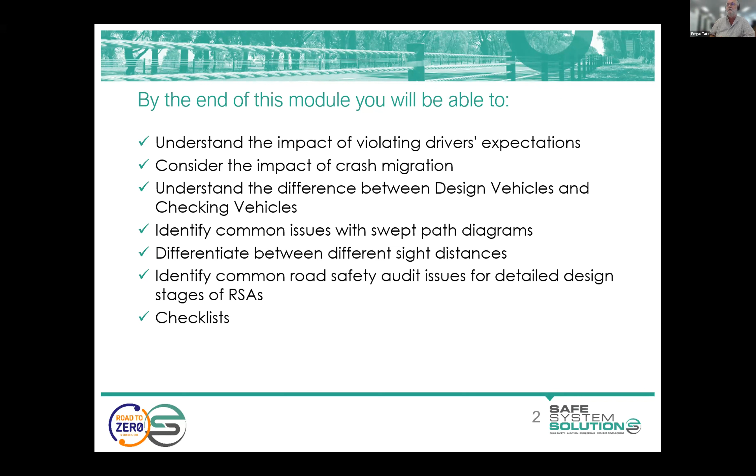I want to talk about the different sight distances, again something that comes up time and time again. And so we're going to look at the common issues in a detailed design safe system audit. And then finally, I know you're not supposed to call them checklists, but I'm still old fashioned, the prompt lists and the role of those when you're out on site. I think Ken has already covered most of this, so I'm going to skip that.

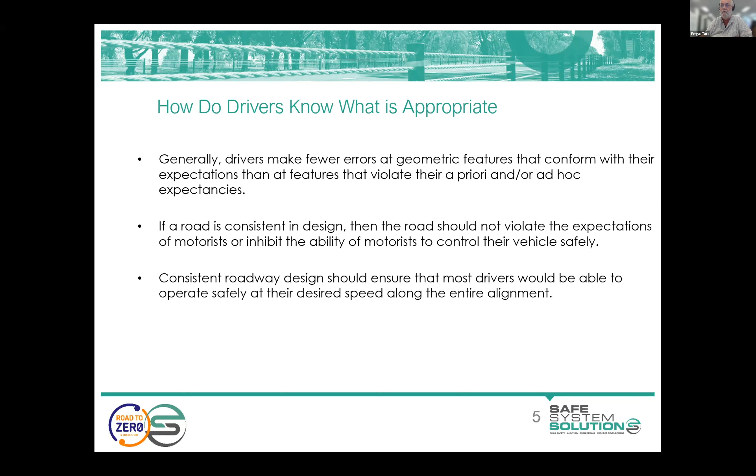Now, the number of times when you're looking at crash data and you see that a crash occurred because of inappropriate speed, the question is, what was the appropriate speed, and how did a driver know what was appropriate? What signals are we getting from the road environment about what's coming next that fits those expectations or modifies those expectations going forward? And as I said, 30% of state highway crashes, deaths and serious injuries in New Zealand occur on out of context curves. So I'm actually going to look now at curves and the factors that impact on the likelihood of making these mistakes.

And there are two things that I want to talk about in particular. One is curves that are difficult to read, and the other is curves that are out of context. So while you might see that they are tight, they're violating your expectations coming through. The other is that it's hard to actually set expectations because they're difficult to read.

Now, when we're thinking about curves, the curve negotiation formula is E, the super elevation, the cross fall, plus F, which is friction, the resisting forces, equal the forces that want to make the vehicle lose control, which is velocity squared, V squared, over 127R, where R is the radius of the curve. So on one side, you've got the resisting forces, E plus F, and on the other side, you've got the forces driving loss of control.

Now, I think I got a poll for that one. I think we've got a poll here, haven't we? So launch that. Hopefully that's appeared on people's screens. Which has the most influence is Ferg's question: E, F, V, R, and he's just explained them there. So there'll be a few answers coming in. Oh, well, people have their guesses on that, Ferg, or have their predictions on it.

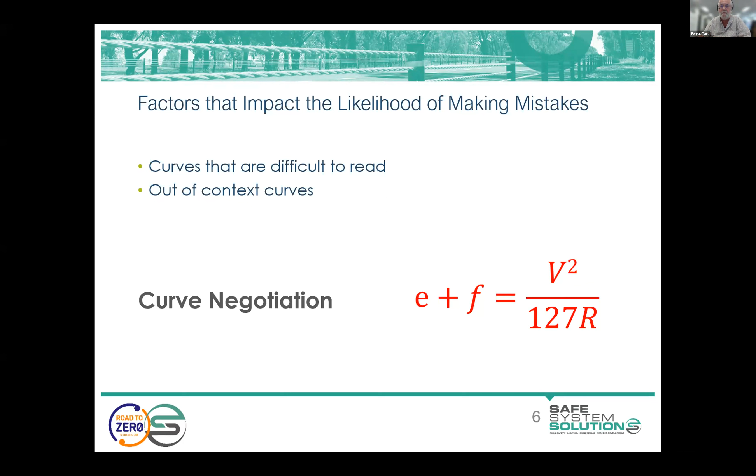So if I go now to curves that are difficult to read, this is some data that was collected by Shane Turner and myself, people driving 488 curves, I think it was, which looks at the radius of the curve, the R, and the design speed of the curve. So if the radius is 300 meters, it could have a design speed of 60 kilometers an hour, or 100 kilometers an hour, depending on those other factors. So while R is something I can see, it's not telling me a great deal about the design speed of that curve. And there's a lot of scope in there to make mistakes.

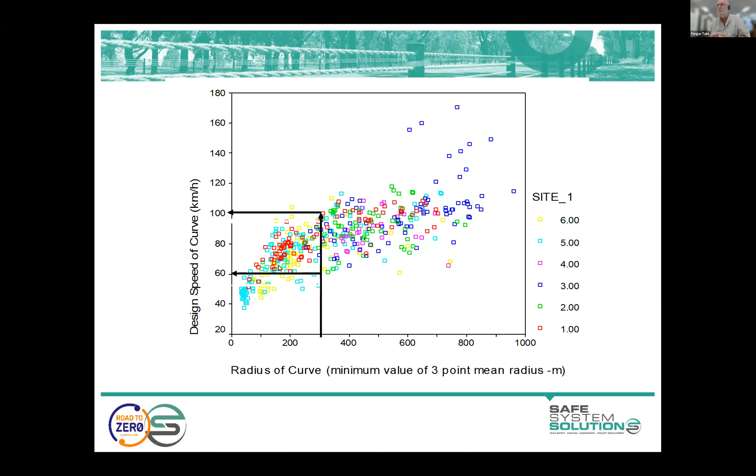But I'm looking in here. This is some data that looked at the mean curve speed of a sample of drivers. And what you're finding is that above about 450, that's behavior on a straight. Even as we come through towards 300, there's a slight downward trend in that data, but negotiation speeds are not actually dropping until somewhere below about 250 meters of radius.

So what you're finding is that people have a wide range based on their prior curve negotiation. They make a decision about what this radius is going to give them, and it could vary from 60 to 100 kilometers an hour for the design speed of the curve, and they're not really changing their behavior as they come into curves between 250 and 300 meters radius and about 450 to 500 meters radius. So the curves in this band are the hardest to read and to make the appropriate decision about what V should be as you go through them.

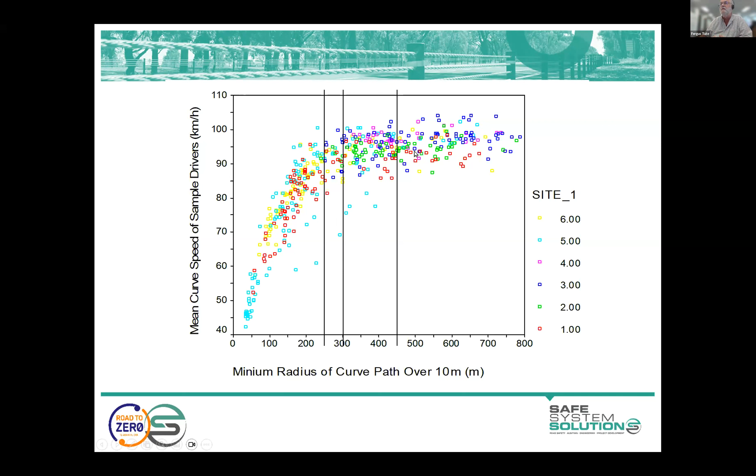So yeah, looking at that data again, we were talking about the 300s, people were negotiating those curves, which could be as low as 60, at speeds in the 90s, up to 110 for the 100 curve. So this is the 85th percentile speed through the curves. What it's really telling us is there's not much change in behavior for these curves, and they can have very, very different design speeds. And as a result, these are the curves that are hardest to read.

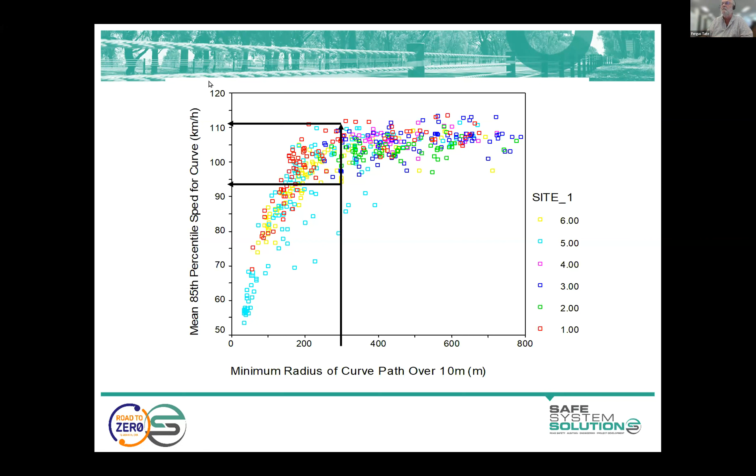And in fact, New South Wales, when they were first looking at this, it was work by Steve Levett, which is extremely good work, actually prioritizes for treatment curves in that 250 to 500, 200 to 450 band. I think they actually go 300 to 600 as the curves that you need to be looking at first, because they have the higher crash rates because they're so difficult to read.

The other thing that becomes really important is the length of the curve and the crash rate per curve. Obviously, you've got more exposure on longer curves, but on longer curves it's harder to straight line them and to effectively flatten the radius. And the other big problem is as you go into them, if you make a miscalculation, you've got less scope to recover and get out the other side without crashing.

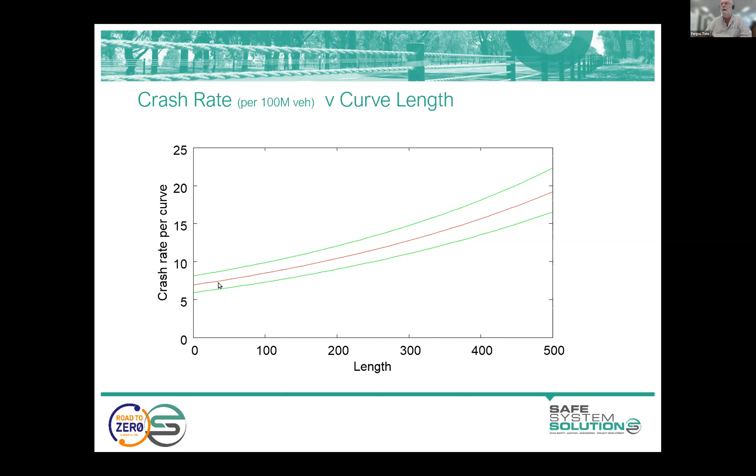So the first thing to look for is curves in that range of, say, 250 to 500, and particularly the long ones, because those go back to that Federal Highways document. They're actually not setting up the appropriate expectations, and as a result, are difficult to read and have a high crash rate.

The other thing is hiding them. The things you should watch out for are dips where you've got something hidden in the dip, like a railway crossing or a curve. You have two curves of the same radius in the same direction, but different design speeds. These broken back curves, you really want to separate them by 2 seconds of travel time. So sometimes when you're looking at alignments that have got curve, short straight, curve, you're much better off...

And I know the computer program will tell you that you've just violated your cuts to fills, but if you think about the bulking factors that you've got for fill, it's a nonsense anyway. It's something that came out of a computer. You're actually better off putting in a single larger radius curve and adjusting the earthworks than putting in curves that are quite close together.

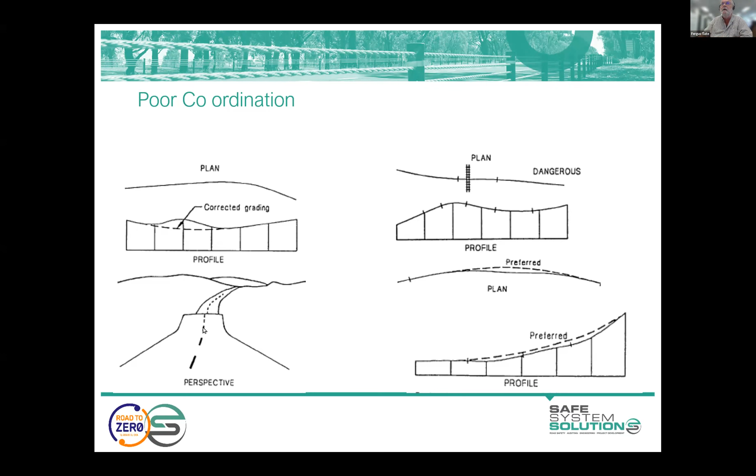A few years ago now, Keith Wheel showed me a vertical alignment which he was auditing. In 800 meters, it had 6 different vertical elements. That's just computer nonsense. You can do that alignment with a single curve and get a much easier to read alignment out of it. So what you really want is to make sure that in plan and in profile, your curves are coordinated to give you a smooth flowing alignment where people can see what's ahead.

Because one of the problems we'll talk about under sight distance is we spend an awful lot of time looking at sight distance to an object that's 200 millimeters high, or 150 depending on what it is, or 800. They're great, but how do you actually know where the road's going? That means you have to rely on the marker posts. You're better off with a flowing alignment where people can see the ground and where it's going. That gives them more information to make better decisions about appropriate speed.

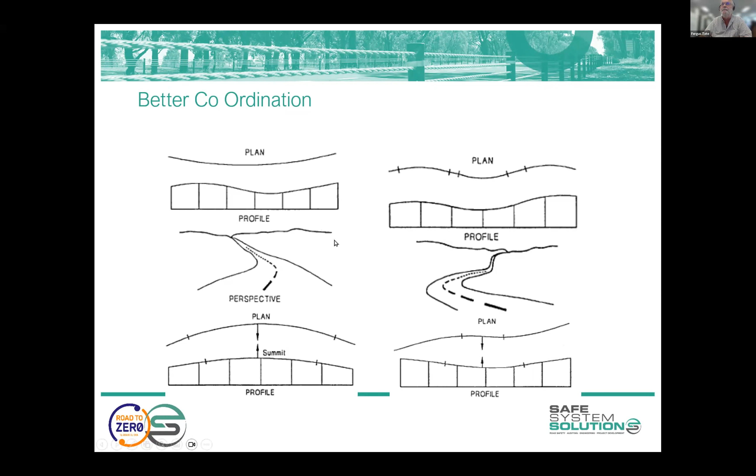The other one I want to talk about is out of context curves. And what do I mean by out of context curves? Well, I don't know how many people are from Wellington, but all around New Zealand we've got the Kaimais, the Rimutakas, the Pahiatua track, the different passes across. On those passes, we have small radius curves, 120, 80, 150. When you're on those roads, those curves are in context.

However, when we're on the plains around the Awatere Valley and things in Blenheim, and the road goes down the straights of the railway line and then does a really tight curve to cross to the other side of the railway line, that curve is out of context. It's not expected given the approach context, and these catch people by surprise.

And there's a strong relationship between the difference between the curve speed and the approach speed and the crash rate. So if we're looking at a 10 kilometer an hour difference between approach speed and curve speed, there's almost no difference in crash rate up to about 10 kilometers an hour. It goes up by about 25% if we go up to 20, and it more than doubles if I go up to 30.

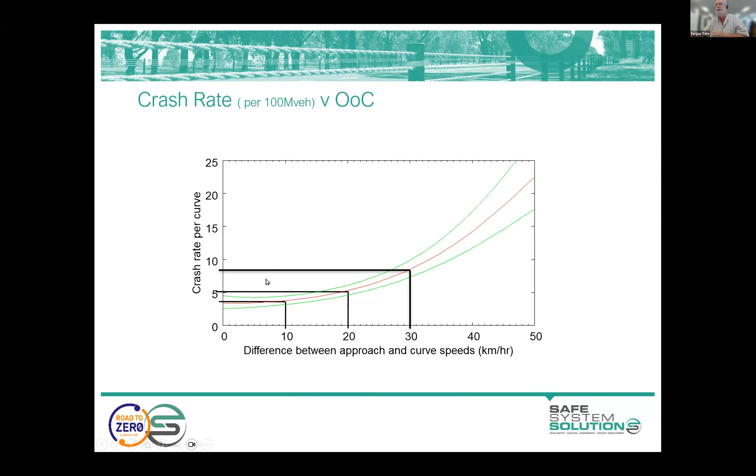Thank you. Now, Jesse's question is probably more one we've got to ask Waka Kotahi directly, and it goes back to our earlier discussion around post-construction and whether you could omit the safe system audit part of it. My understanding at the moment is they're saying no, we want that consistently done for all. I think as they do their review of the safe system audit process, which they're putting out now and everybody's using, they're going to take feedback, and I think that'll be part of it. But for now, I'm told that for every safe system audit, you go through the full process. So I don't think that is the case, but I will double check with Waka Kotahi to see if they've changed their opinion.

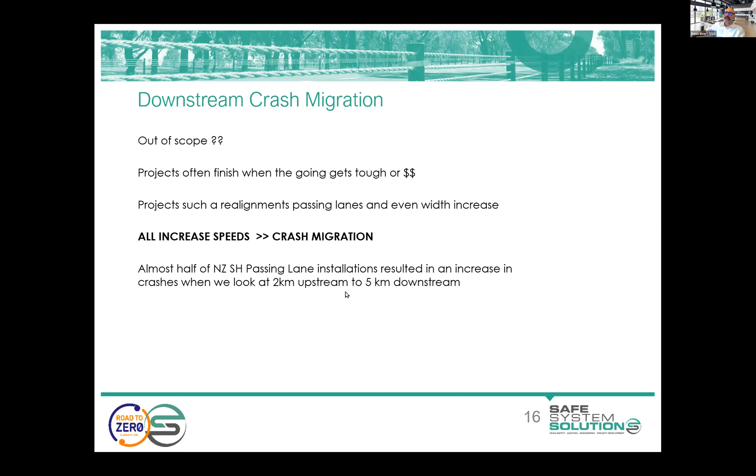Okay, back to you, Ferg. Okay.

So when we're actually doing the safe system audits, I think it's important to make sure that you're properly informed when you're going out, thinking about who the users are going to be and in what volumes they'll be using it. Particularly now with the safe system assessment framework, the traffic data and the types of vehicles become really important, and the volumes of cyclists. It doesn't have to be perfect, because in the safe system assessment framework those bands are quite large.

One of the things that I like to look at, but it shouldn't drive the road safety audit or that part of the safe system audit, is the crash history. What is the problem you're trying to address, if there is a safety issue there, and how are you going about addressing it? I think that's really important, as are any previous audits that have been done and what they were doing.

One of the questions that often comes up, Ken, and I don't know what your thoughts are on this: in the very first preliminary audit, for some reason they've chosen traffic signals, and the auditors have said a better safe system solution for this site would be a roundabout. But they go ahead and do a design, and then you audit that. Do you again say the best safe system solution for this should be a roundabout?

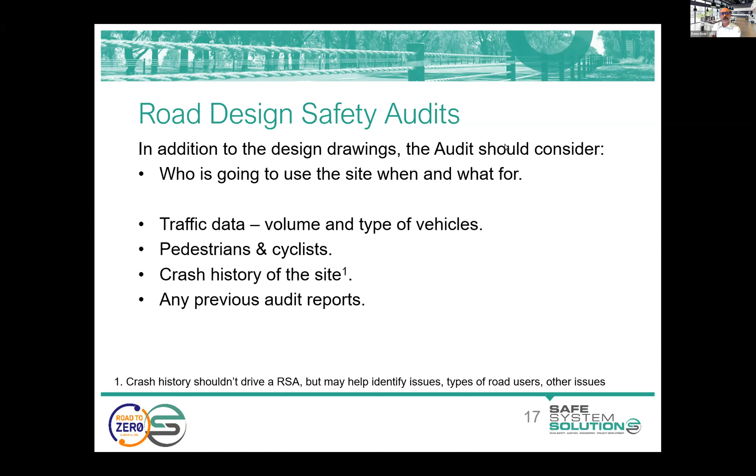Yep. Okay. So heavy vehicles, as I said at the start, heavy vehicles and heavy vehicle tracking is one of the things that comes up regularly in the audits that I've been involved in, particularly in urban areas, and there seems to be a lot of confusion around what's actually going on. So I actually had a question in there. Who can tell me the difference? Because when you're looking at heavy vehicles, we have a design vehicle and a check vehicle.

And I think we had a poll at this point, Ken, but I don't seem to see it. No, I think we might just have people write it into the chat for us, and the first person to write in the chat can have a prize even. So you're asking the difference between a design vehicle and a check vehicle? Exactly. All right, we'll see what people come back with as their guesses. Remember, you're not marked on anything that happens in the live session. You've got a little quiz afterwards to check that.

So we've got Jesse said design vehicle is the everyday use of the intersection or road. Check is for more low use cases. And then Matthew's just jumped on the bandwagon of Jesse's comment, said, yep, agree with that. That sounds pretty good. What do you think, Ferg? Anything you'd like to add to that or tweak?

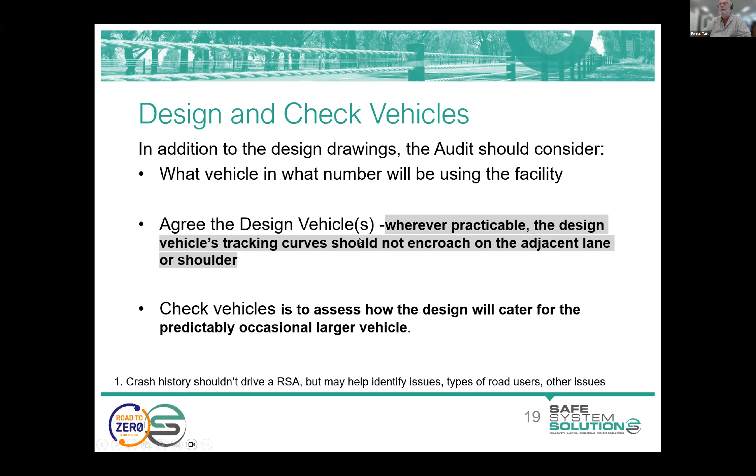And I think one of the things with them as we're going through is particularly things like mirrors and overhangs. And I'll go through some examples. Some of these are Ken's, which I've stolen. I think the big things that we get with the vehicle is the choice of the wrong vehicle.

You know, everything does not need to have a quad axle semi go through it. There are lots of situations where that would be an over design, and that quad axle semi might actually be the check vehicle, not the design vehicle. But choosing the right design vehicle, one of the interesting ones that you typically find, the quad axles and things like that are articulated vehicles.

And while they're very big and have quite complicated turning, often in urban areas, a tour coach, particularly if it's only front steer, will actually be a more difficult case than a quad axle, because the quad axle is articulated and the fixed vehicle isn't, and it has a much bigger swept path, particularly because it's got bigger front overhangs. So while people are saying, oh, I can get a quad axle semi through here, you may not get a tour coach through there. So choosing the right vehicle.

And you think schools, well, around a school, often there are school trips, they use tour coaches. So in an urban area, making sure that the roundabouts near the school can actually accommodate those, whereas they might accommodate on their aprons a quad or some articulated vehicle. They won't necessarily take a bus.

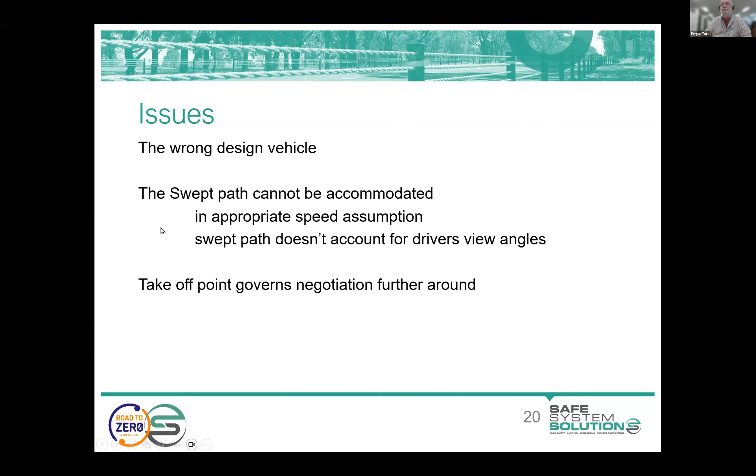Yeah, and as I say, the common issues are encroachment in other lanes, encroachment into pedestrian areas, particularly with buses and coaches and large rigid vehicles that cut the corner, and you'll see crash down curbs. And the other one, my friend Frank Lai did a big study of pedestrian bus issues in the UK at one stage. The biggest issue they had was pedestrians being struck by the wing mirrors of buses as they waited to cross the road. And you can imagine a big wing mirror to the head is going to hurt like hell. If you're unlucky, it could actually cause real damage.

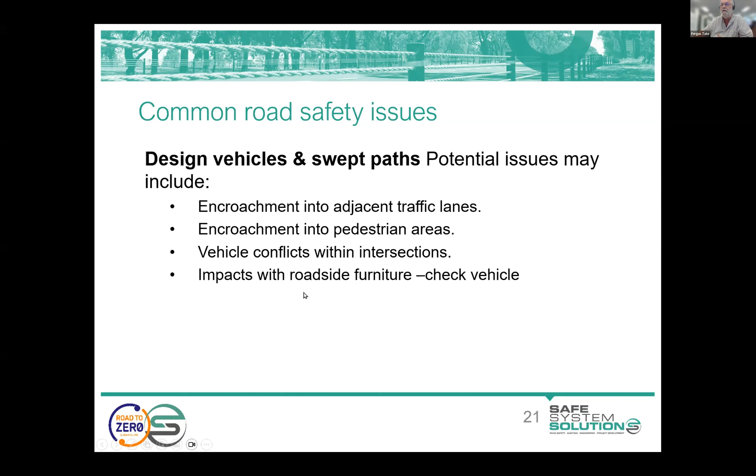And then vehicle conflicts within the intersections and with roadside furniture. So I'm looking at a job here, which has been set for a quad axle.

Its lock-to-lock turning time is 6 seconds, which is reasonable. It's hard work, but you can do it, and it's also been checked. But if you have a look here, this is quite a heavy freight route, and they've made use of the fact that Austroads says you don't have to have two heavies doing the same maneuver. You can have a single unit and a heavy doing this. But as you come around here, there's issues in here.

You can see my mouse, can't you, Ken? Yeah, yes, it's small, but we can see it. Okay. And so, I have some questions for you when you're done with this, Ferg. Oh, well, do you want to fire for now, or?

Oh, okay. Well, one was around, I mean, sort of what you're talking about here, but are there any rules around road speed limit versus acceptable check vehicle maneuver speed? So that relationship? Not that I'm aware of. I haven't, and it is typical that we end up with low speed. Most people use low speed, particularly from lock to lock. So no, there are no rules that I'm aware of. Yeah. But it is something that you need to check. Yeah. What's your next one?

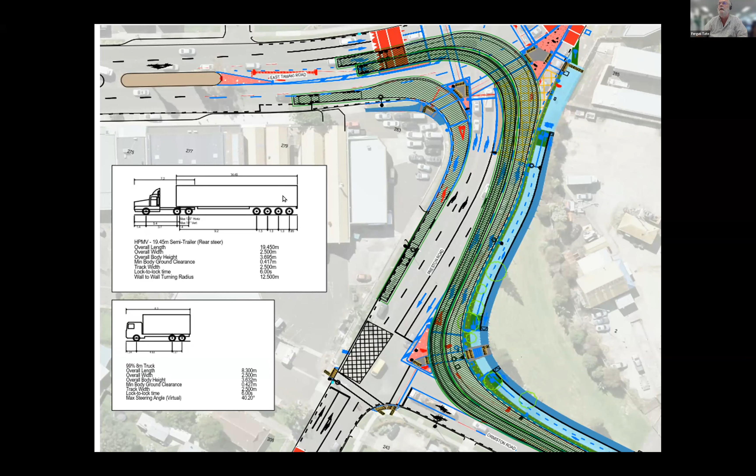Okay, so common ones. I historically have driven buses, so I have some experience, and the odd truck, but not quad axles. But if I see a turning curve that looks like this, you know that this is bullshit. This is somebody who's invented a turning curve to just make it fit.

You would not, if you were driving, do this where you're turning this right turn from the side road on the right, where you slightly reverse turn so you get through there. You come forward, you turn and just avoid the curb on the other side. That's nonsense. That's a made-up turning curve, because if I'm coming through here in my bus, I make that in a single maneuver and I encroach on everything as I do it.

There's no way Mr. Joe with his hat on backwards and his sunglasses on is going to actually know that the only way to get through this intersection within the confines is to do a little bit of a turn and then turn back and then do another turn. It doesn't work like that. That's an artificial situation to just get you through. So I would be sort of alarmed when I had a look at this.

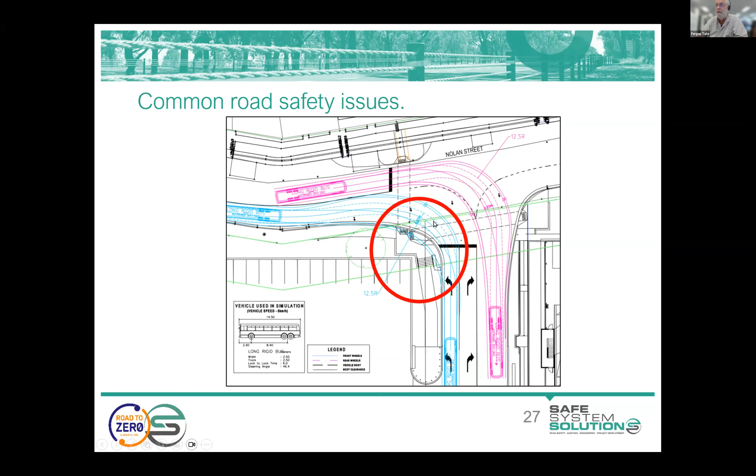And he can't even stay in his own lane over here, and it would be quite possible in this situation to have a vehicle waiting to turn in or turning in as one is coming out, because those are the vehicles that are using it. So all in all, it's not a particularly satisfactory design, is it, Ken? No, and for a brand new bit of infrastructure like that, fairly disappointing. Yeah. And this idea that 12.5 is the radius that you should be using, when you've got long rigid vehicles, that goes out the window. He's having to start to turn from way back, and the overhang is quite high. Yeah, so I did have a highlighter.

Here's the other direction, at the same bus station, same type of thing happening. This one actually ends up, I think, not quite encroaching, but the one turning out does. And it would be quite possible to have both of these vehicles at a busy bus station operating at exactly the same time. They're not even protected by signals. You could possibly make sure that this one didn't move at the same time as this one. It would be very inefficient in terms of signaling, and you can't stay within your lane as you're going through.

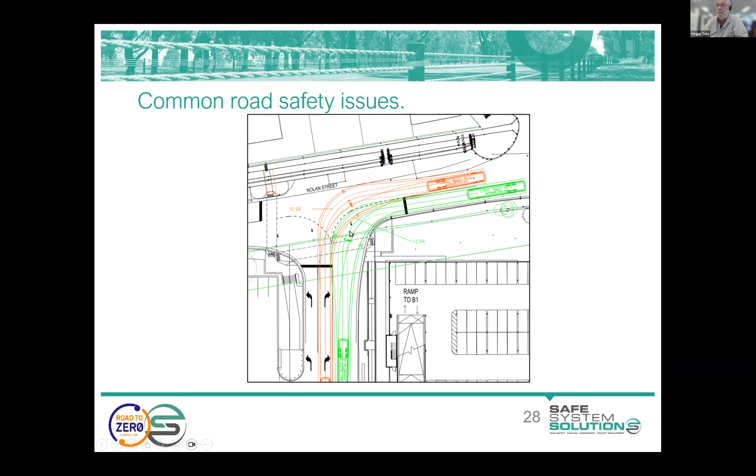Yep, so there. This is Namutawa roundabout. Now, here is one of these lock-to-lock points here. So you're coming in here and you're turning very hard on a left-hand turn to get around the first part, and then you've got to go hard over to the right-hand turn to get around. Now, as the speeds increase, that isn't a point, it becomes a flat, and this actually moves out. So lock-to-lock, I always look for these. This is another one where you're going to make multiple steering adjustments, even for a car going through there, let alone a heavy vehicle. It will tend to track straight through and probably encroach on anything.

This is actually the heavy vehicle bypass for the town, and this is the industrial area over here. And so although Austroads says that you don't have to have two heavy vehicles together, in this situation that would be quite possible. The other thing that's really interesting on this one is this vehicle here has to be as hard over as it possibly can in order to get out the other side of this intersection as it comes round, because otherwise it gets stuck. And here's another lock-to-lock with a bit of drift on it. You'll see that it's got slightly higher speed. It's flatter through there, as opposed to this point where it's low speed. It's assumed to have gone hard from lock to lock.

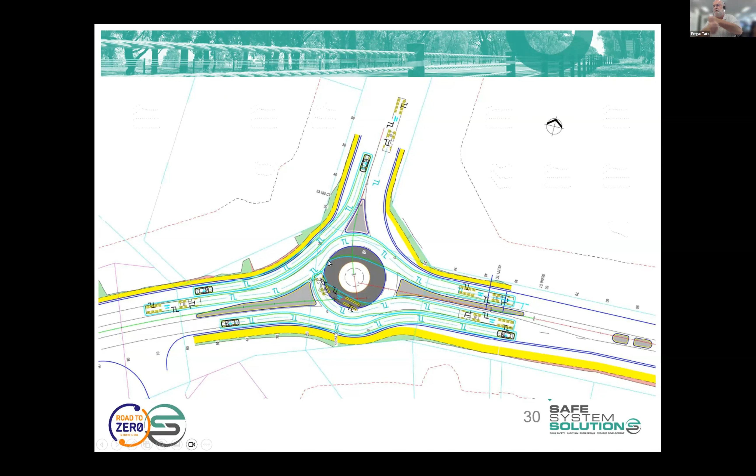This is another one where the swept path doesn't account for the driver's view. If I'm sitting here in my truck, and I'm around enough that I don't hit the barrier as I make my left turn out, I can't actually see back behind me to see the vehicle that's going to hit me when I pull out. So the swept path doesn't account for the driver's view angle.

If I square this up so that I can see better, which is what the truck driver is probably going to do, he's not actually going to get round inside that barrier. So there's a very high chance that that barrier terminal end will get damaged quite regularly, which means that you've got a safety and design problem because people are going to go out. Not only that, because it's the terminal end, it's the most expensive part of the barrier. So it's not particularly useful in that space either.

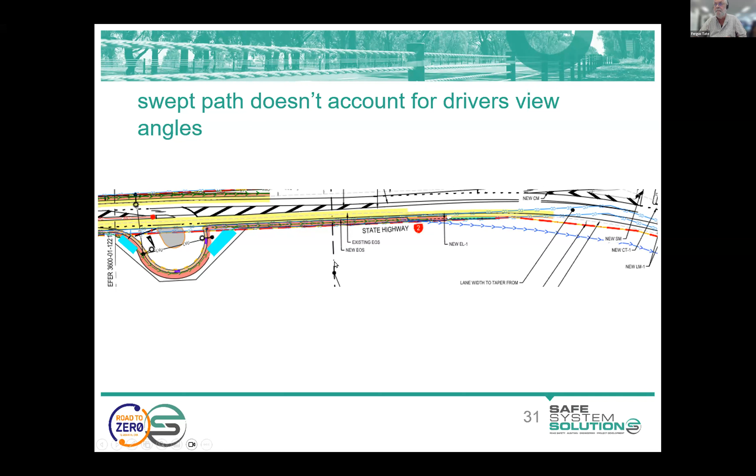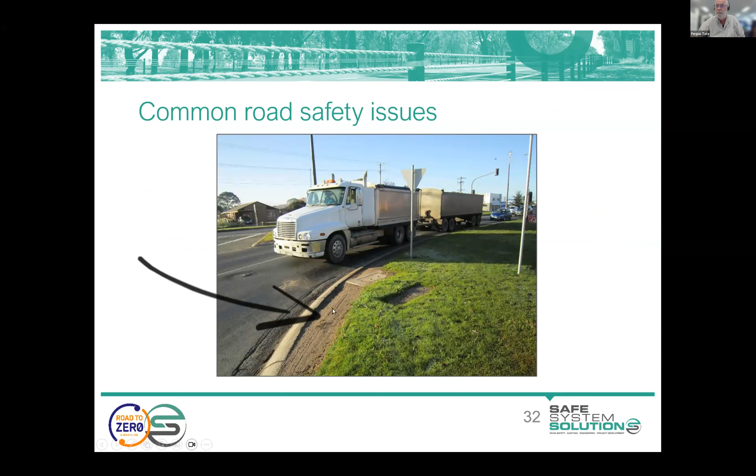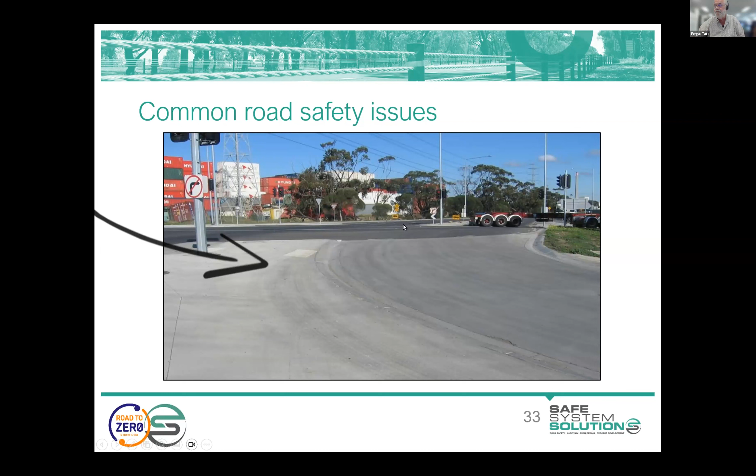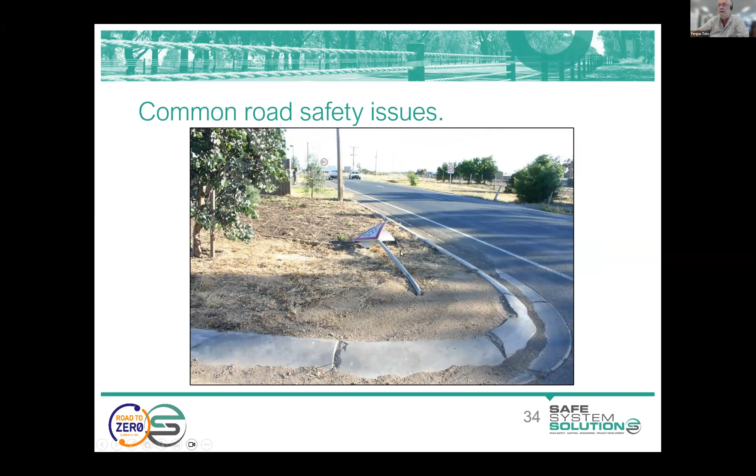Right, when you're out on site, you can see where there are problems and things. This guy here cannot get around here. The evidence is quite clear that they've all been running over the curb. Same here. Again, in order to get round here, they're having to swing wide into here, or their trailers are coming wide so that you can go up there. Damage to infrastructure again as a result. So these are all things that you can see when you're out on site that give you an indication that there's something that's just not right.

Sight lines. Oh man, there are so many different sight lines, aren't there? To other vehicles, to other road users, to the pavement, and they can be restricted by the alignment, by parked vehicles, by skewed angles at the intersection, as I've just said, those approach angles that can muck up your sight lines. One of the most important ones is we always talk about safe stopping sight distance, and it's typically to an object that's on the road.

Somebody once told me that the object was supposed to be 200 millimeters high because that represented a body lying on the road. You guys can't see me, but I can tell you that my body is a damn sight bigger than 200 millimeters lying on the road, that's for sure.

But if you can't see the pavement, you have to rely on other features such as edge marker posts or hedges or fences to tell you where the road's going. So as much as possible, we actually want sight lines to the pavement. And this is particularly important at intersections because it tells you where to stop and where you're tracking. But even on rural roads, particularly if you've got side roads and things like that, you can't have edge marker posts. You're relying on RRPMs and the pavement markings to tell you where the road's going.

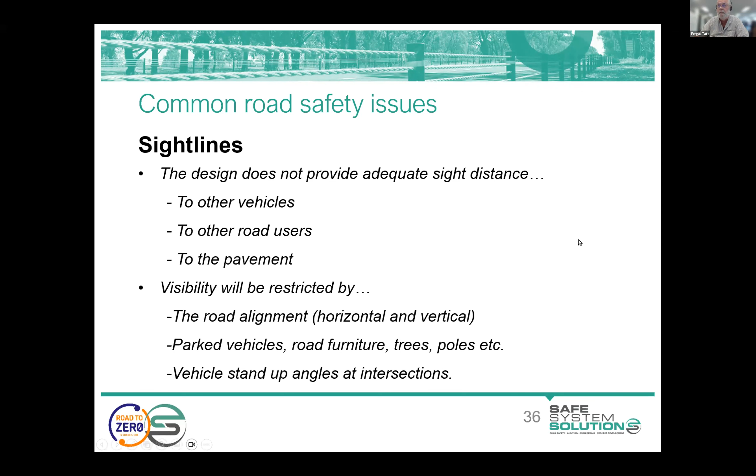And if you can't actually see to that road surface particularly well, it makes it very hard to negotiate, very hard to see the curves and work out what the appropriate speed is, but it also makes it very hard to work out where you're going as you go through. So the standard ones are the safe intersection sight distance, where things like parked vehicles, fences, hedges and things can create problems with the sight lines.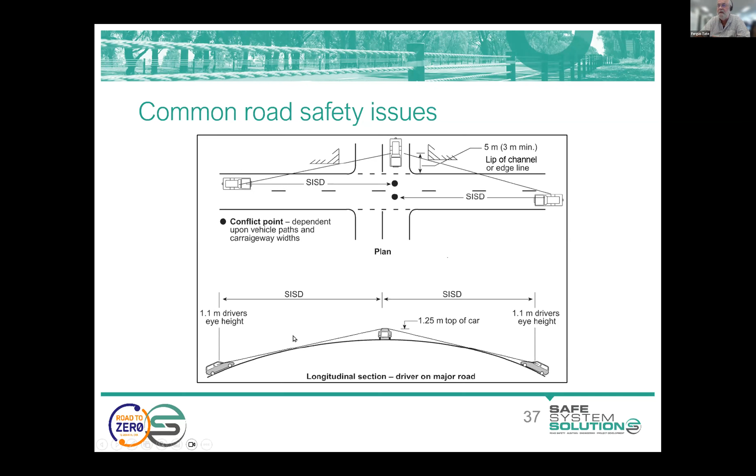And again, if you're looking at this bottom picture here, if you're looking to the road surface compared to another vehicle, you're only seeing half the distance if you're going to the road surface in that diagram. So it's really important to make sure that you can see where people are coming from. And the classic is where you've got left turning vehicles with slip lanes. You can't be sure whether the vehicles in the slip lane are going straight through, and you make the wrong decision, thinking it was in the slip lane and it's not, because you can't see the vehicle in relationship to the markings, because you can't see down to ground level, which becomes really important.

This is one of Ken's. You can tell because the houses aren't that flash in New Zealand.

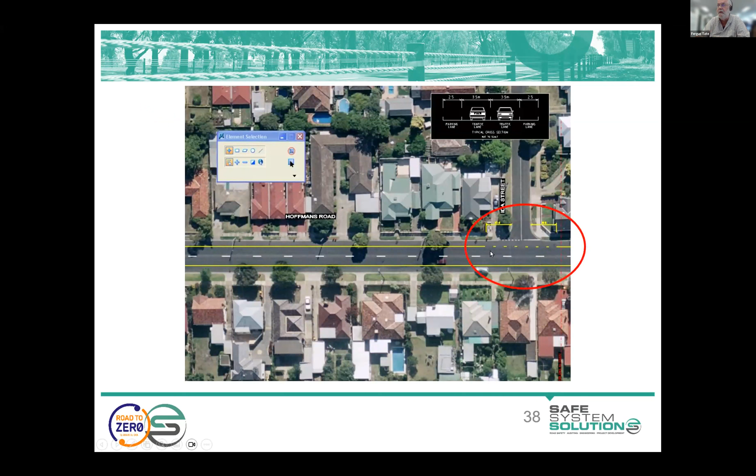And looking at this intersection here and how the sight distance is restricted, in this case by parked vehicles. Now, if you're looking at that, there's a Toyota in the front of the picture and then there looks to be some sort of Range Rover or something, and you can just see the roof of the Mercedes, the top of that Mercedes as it comes through that white bit there, just coming through.

The sight distance is insufficient to allow you to actually identify a gap that you can pull into, and therefore you've got a high probability of making a mistake. So, in terms of the sight distances, we've got stopping sight distance, approach sight distance, entering sight distance, maneuvering sight distance, minimum gap sight distance, overtaking sight distance.

I think the big thing is that you need to actually work your way through them for the situation that you're working at. And with things like stopping sight distances, as I've said, go to object heights: is it appropriate at that position? Should we be looking at the maneuvering sight distance and looking at what's on the road?

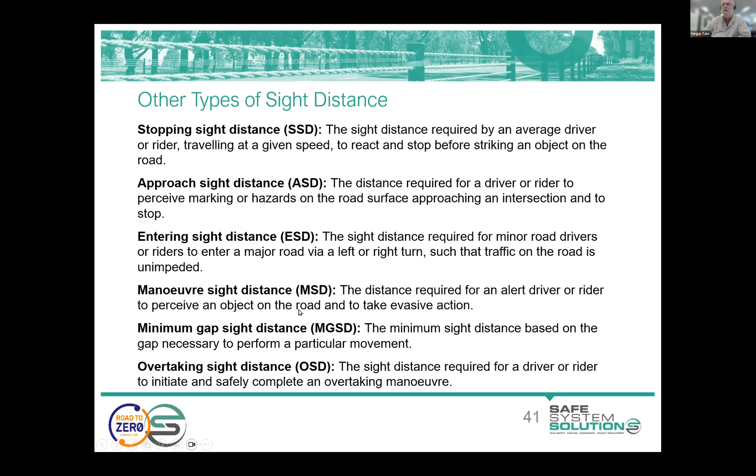The overtaking sight distance, I think, is 450 meters, typically for a driver to safely commence a maneuver. In some situations where the differential between the overtaken and the overtaking vehicle is very low, you may find that that's actually overkill. Whereas, depending on the approaching speed of the opposing vehicle, in other cases it will be marginal. So you need to have a think about the specific situation and what's giving you the clues that you need in terms of that sight distance.

So common issues that I found are things like the see-through effect. That's where you're coming up to an intersection, but the road is actually projecting away from you, and you don't notice the intersection because everything is leading you down the road. Stand-up angles I've already talked about, which is the angle at which the vehicle is located for the sight distance.

I think the other one that comes up time and time again is that safe stopping sight distance at an intersection should be to the back of the queue if queues are going to be there regularly. Everybody checks the sight distance to the intersection, but if you've got a 50-meter queue or a 100-meter queue night after night, you need to be checking the safe stopping sight distance to the place where you think you're going to have to be stopping, not the front of the queue.

Line marking issues. Particularly when you're thinking about line marking, think about motorcycles and mopeds. There's nothing worse than wet line markings in the braking zone for those guys. Only the other day I was walking up to the office and I watched a guy, a learner on a scooter, hit the big wet arrow, and yep, he was all right, but that's it.

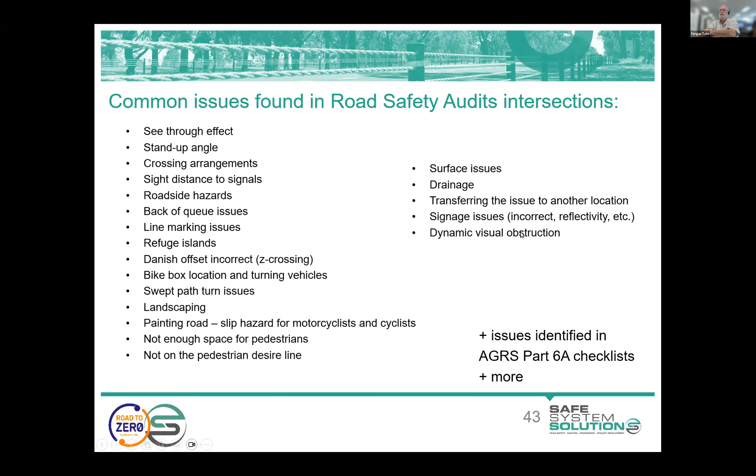One by Cherie Mason, who did her master's thesis on it, and the other is a model that was built looking at the offsets of the geometrics by Dr. Shane Turner from Abley. If you're looking at left turn slip lanes, I would certainly look at Shane's work, because in a number of places we've taken left turn slip lanes out because of the crash problem of dynamic visual obstruction with one vehicle blocking the through vehicle.

In rural roads or in mid blocks, I think the big ones are roadside hazards. Roadside hazards and the management of roadside hazards is one of the key factors impacting road safety. It comes out really, really strongly when you're looking at your safe system assessment frameworks, because it's one of the key things for runoff road crashes, which are the most frequent crashes on the New Zealand road system.

We do tend to kill more in head-on crashes, because typically your head-on crashes involve at least two vehicles, and you tend to kill more occupants, whereas roadside hazards are a more common crash. But I think from memory, we kill or seriously injure about 1.17 persons per runoff road crash into roadside hazards, whereas for head-ons, it's about 1.21, so it's more people killed or seriously injured in the head-ons.

But roadside hazards are a big thing, and they're a big thing not only in terms of the safe system assessment framework, but things like the infrastructure risk rating and the KiwiRAP or the iRAP assessment tools, which are looking to more quantify crashes and the crash reductions.

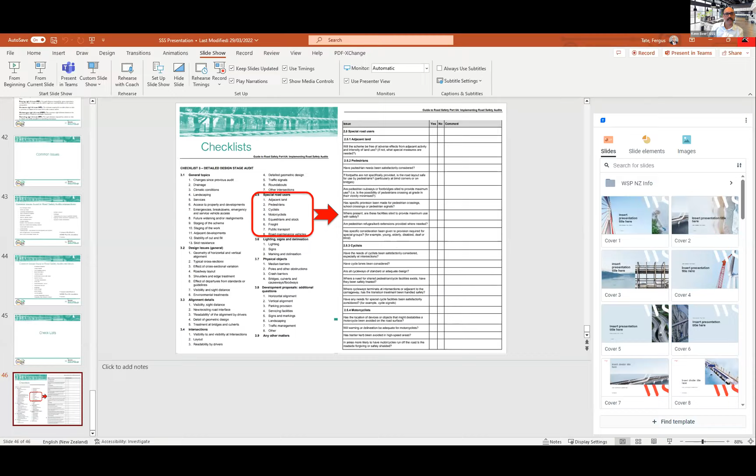The only thing that would be better, Ferg, is if we did this in person together. But that will be for a future time. That would be good, and we can always do a beer with Ferg. Although I'm always open to a beer. A beer with Ferg is our dream. The podcast or the like. We'll get it going. Thanks, Ferg, and everybody.

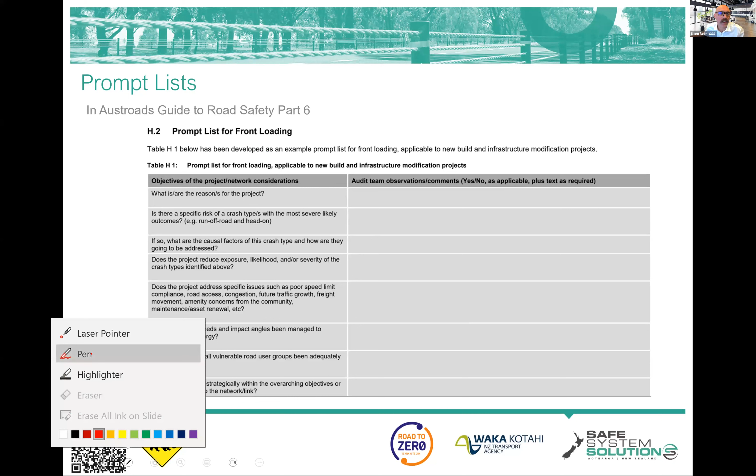The prompt list in the Austroads Guide to Road Safety Part 6, which I'll show you in the learning management system, has some general front-loading questions, they call them. Front-loading just meaning questions you'd ask yourself upfront about the general aspects of the project. Why, what's the reason for the project? We're thinking about safe system energy management and those sorts of generic questions. But then it goes into these 5 prompt lists, covering local alignment, general aspects, intersections, walking and cycling, signs, line marking, lighting, and the like.

And you can see that each of these prompt lists has columns: feasibility, preliminary, detailed, pre-opening, and existing roads, or post-opening, which is more relevant for New Zealand, because you don't really do existing roads as such. Similar processes are undertaken, but they're more called crash reduction studies or the like. But post-opening audits really is what we'd be thinking about. So you get these questions; they're there to spark your thinking in different areas, and it's a very good way to make sure you're not missing whole areas to think about. You don't hand your prompt lists in, I should say, as part of a safe system audit. They are just there for your thinking.

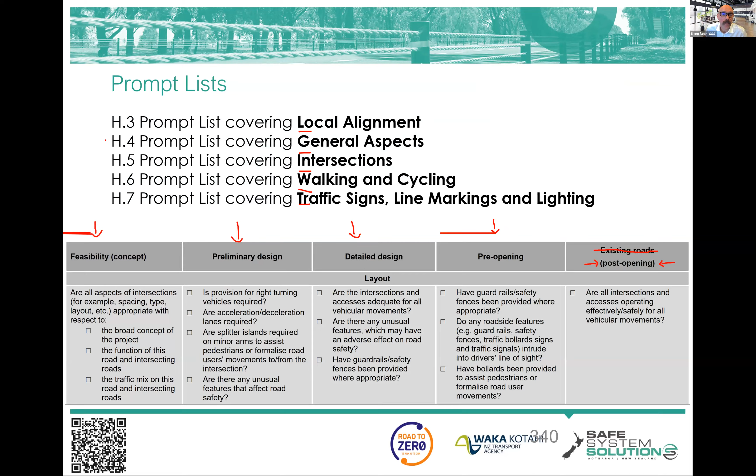So I just want to talk briefly again about primary and supporting treatments. I think people are generally getting their head around it, but this document is quite helpful if you're really still struggling there. It is the Safe System Assessment Framework. It lists a whole lot of things and categorizes them into primary and supporting. So I'm going to show you that in the learning management system as well when I jump in there, just because I think there's still a few people struggling a little bit with that concept of categorizing treatments into primary or supporting.

Next session, we've got Sam Paisley, the Safe System Solutions New Zealand lead. Some of you probably know Sam. He's been around a while in road safety. So he's going to come in and we're going to talk through the general process of safe system auditing within New Zealand and some of those specifics around Waka Kotahi's requirements, what local governments are doing, and the like. So yeah, if you've got any questions around that New Zealand policy process, let's ask those to Sam in our final session we have together on Friday.

But the one thing before I do that is we are going to ask you to go to a site. Now, this is a site that we have prepared for you near your home or your office or whatever address you gave us. So you will have to go out to this site. It shouldn't be far from where you are.

Now, if you did have to travel for an hour or something to get there, just tell us. We can provide you another site that's closer to where you are. But when you get out there, we've risk assessed these sites to ensure that you can visit the site and be safe, because we don't want you putting yourself in any risk to have a look at this site.

But each of them, there are areas you can park safely if you drive there, and there's areas you can stand and look at the road and the road environment without being near live traffic or anything like that. We want you wearing a high visibility vest. You are sort of out there in a training capacity, so we want you wearing a high vis vest. We don't need you to measure lane widths or anything like that, so you can stay off the road or cross at the crossing points.

Don't be a hazard yourself, and that can include where you park, that you're not blocking cyclists or the like. And I'll take you shortly through a safe work method statement, which is just something to ensure that you understand your obligations when you go out and look at this site, and that you'll agree to that. And it's very simple stuff, like that you're not going to be intoxicated when you're out there, and that you'll act appropriately and safely.

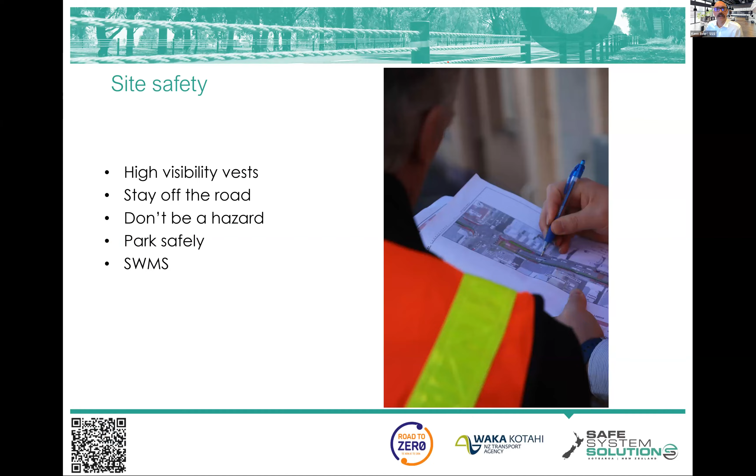Just a quick question here from Josh. When completing the audit, is it necessary that every team member completes a site visit, or can one member complete the site visit for the team? I believe it's one each. So I think there's two things there. There's a question around the assignment, and then there's a question around general practice in safe system auditing, as to how many you would need. So for the assignment, yes, every individual within this course needs to go to the site themselves.

Okay. For safe system audits in general, there are situations, especially for lower risk projects, less complicated projects and things like that, where it may be that one person visits the site and the other team member is doing desktop reviews and the like. We prefer it if the whole team goes to the site as a safe system audit team, but there is some possibility around that. But yeah, good practice is for everybody to go out there and discuss things out on site.

Okay, thank you, Loretta. Jump in with any other questions that do pop up, and I encourage everybody to be asking questions as we go. But I'm going to jump into the learning management system, where you all feel very comfortable, no doubt, because you're spending a good bit of time in there.

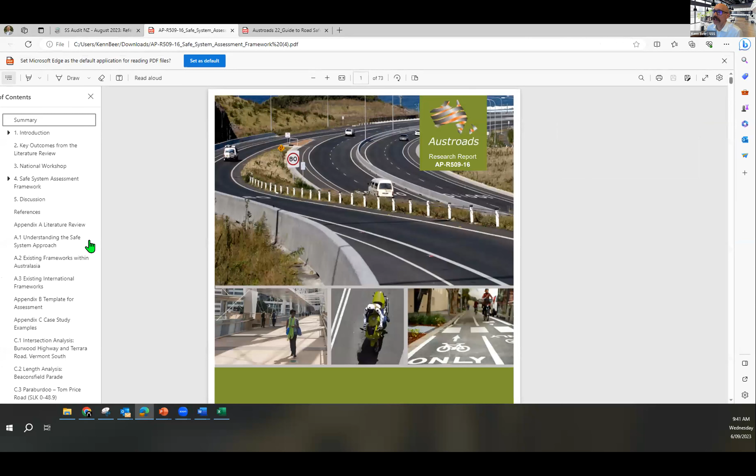So let's start with some of the resources that I've mentioned. So if we go into the resources tab here, reference documents and resources, the first one you see there is that safe system assessment framework document. It is going to provide you with those. So it's about page 14, I think. If we zip down to about page 14, is where we start to get, yeah, here it is. Oh, it's page 15. It's one off.

You start to see here that we've got primary treatments, and then we've got supporting treatments. There's actually a subcategory of supporting treatments, but the green are your primary treatments, and these are for run-off-road crashes, and your orange and yellow there are supporting treatments. Okay, so then you've got that for head-on crashes, primary, supporting, intersection, other, pedestrians, cyclists, and motorcyclists.

So you can see that helps you a little bit along the way. There's lots of treatments that are not mentioned at all in there, and you would have to make the call from first principles as to whether it's primary or supporting. But that can help you a little bit if you're struggling in that aspect.

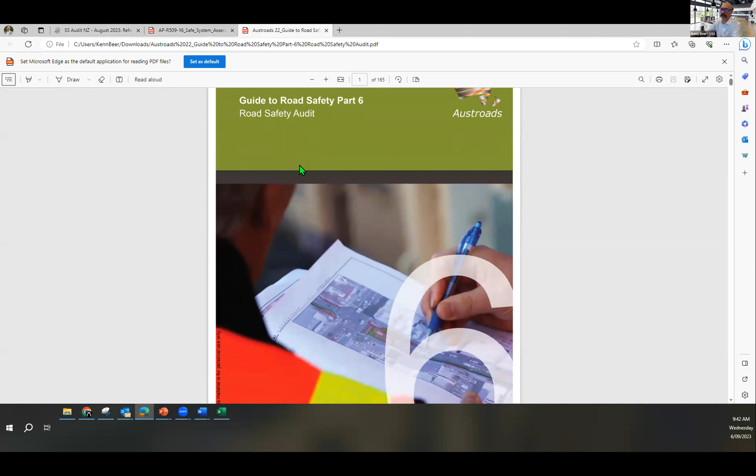The Austroads Guide to Road Safety Part 6 is the third document down here. And that document is this one. That's the road safety audit guide from Austroads. The reason you might want that is to go to the prompt lists, which are right down the back in an appendix. Where are we getting to prompt lists?

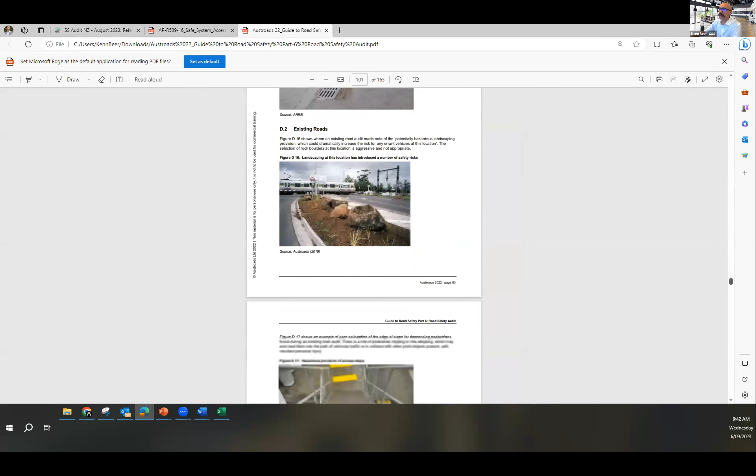Examples. Lots of my audits in there as examples, actually. But here we go. We get to prompt lists in the appendix, H2, so we're down at page 122, so it's a pretty extensive document here. You see the prompt list, front loading, and then you're into H3 being the prompt list for local alignments, and you can see all these prompt questions for you, and then general aspects, H4, and the list goes on. So that might be a spot if you're needing some inspiration on looking for issues at a site in a design.

Okay, so we're going to go back here, and you catch up on any quizzes you need to, but we're down here in module 5. And what we have in here is the quiz is gone. They're hidden from students, so you won't see that. That's because the quiz was just how many Wallies, and we've taken that out because it didn't work. But down here, you'll see module 5 assignment. So you're going to go in there, and that's where you'll find information about your assignment.

The first thing is to do this safe work method statement. So that's the statement of what we're expecting of you. Normal stuff. There's some stuff in there about COVID, some stuff about driving to a site, and we want to ensure that you do everything as safely as you can, and that we've tried to make that as safe as possible for you.

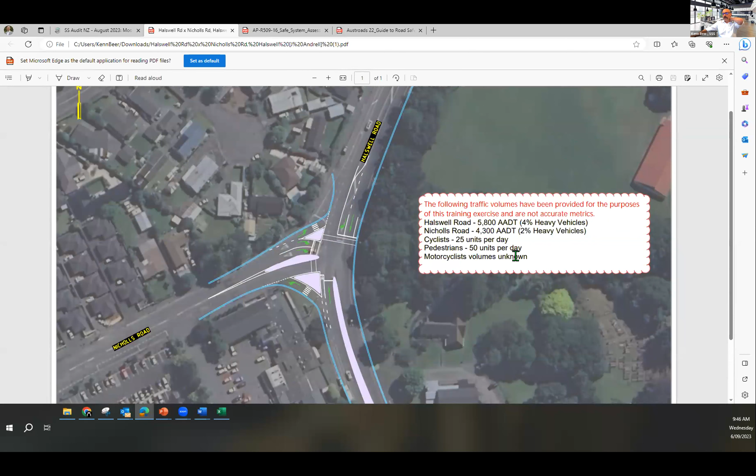Yeah, use that, and you might have to make an assumption on some. So use that when you're doing your safe system audit. Okay, so then you're going to find your site. You'll notice some of them have a few people, and that's probably because these people all live in generally the same area. You might all know each other. You can go out there together if you want and chat about it, but you're going to need to submit your own safe system audit, and we don't want to see the same text in these. So be aware of that, because we are issuing you with an individual safe system audit certificate.

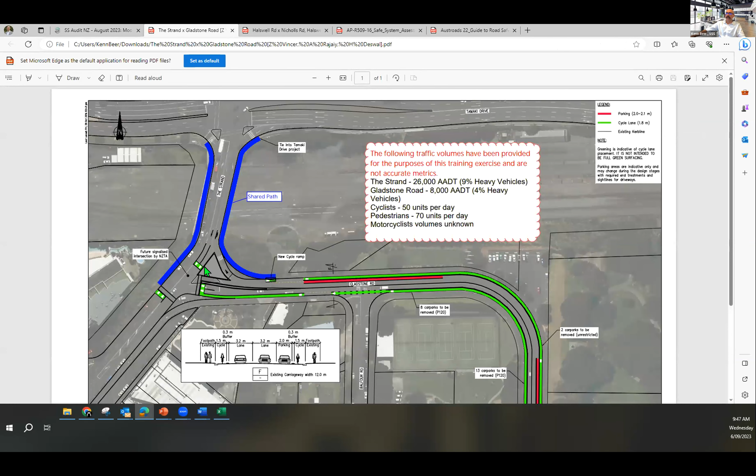So there you go. There's another one, a bit more interesting one. Not sure exactly what's going on there, but these should all be fairly close to your house or your workplace. If for some reason you say that's nowhere near me, that's on the wrong island, don't worry, we can issue you another one. Just get in contact with the training at Safe System Solutions.

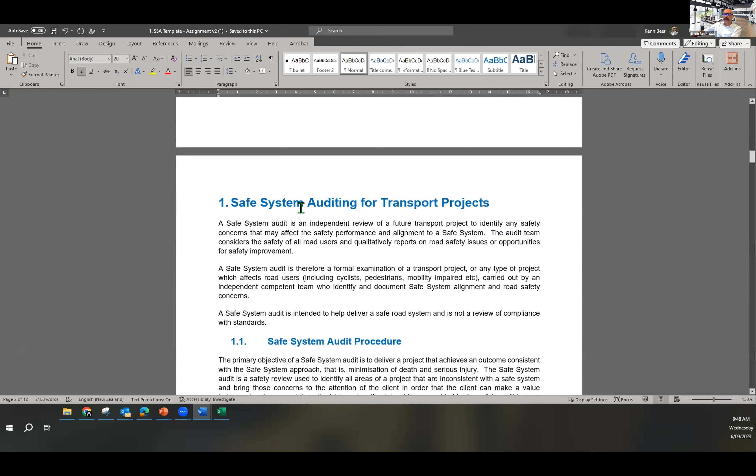So then you've got the Word document template there, and this is the actual Waka Kotahi template, and you're going to need to fill it out. You could name your project name, location, whatever, just anything there. We've put it here as training course 1. And then you're going to go through and fill out the bits. Now, I've highlighted bits to make it easy for you, because this is standard text that will always appear in all of them. That's Waka Kotahi written text. It's just there.

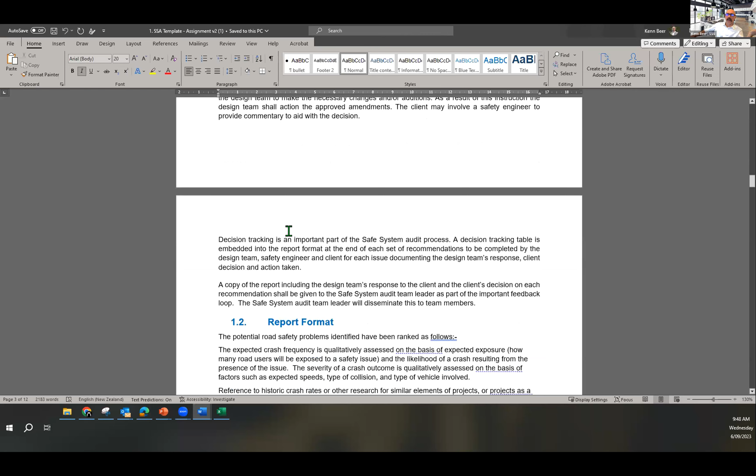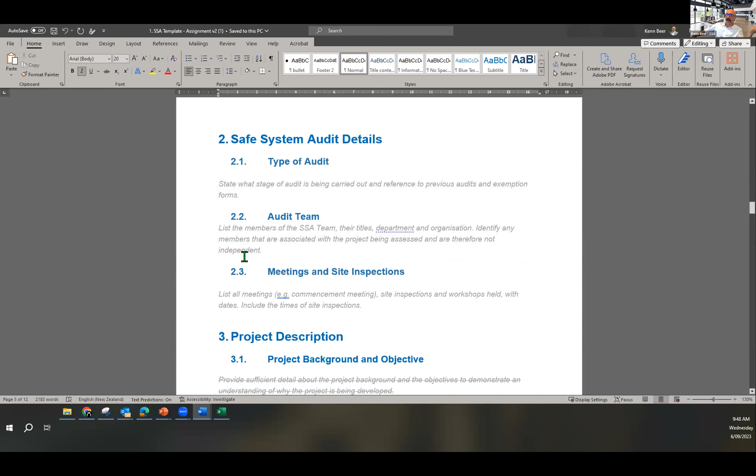But you can see here, actually, these should be highlighted as well, sorry. You're just going to fill out the bits: what type of audit was it? Well, the team's just going to be you for this one, for the training exercise, when you went out on site. A bit of description about the existing conditions and context. Now, this can be brief in terms of comments around the function of the road, speed environment, things like that.

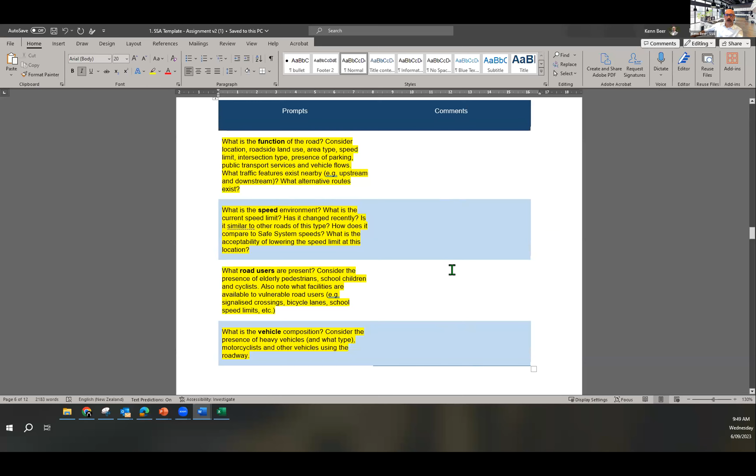In a full safe system audit that you're doing, you'd probably dig a little bit further, get a lot more information. You're really going to be strapped for information in this mock exercise. So a few dot points there. Explain a little bit about what's going to be done. You could put a snip of the drawing in there if you want. That's a very handy thing to do.

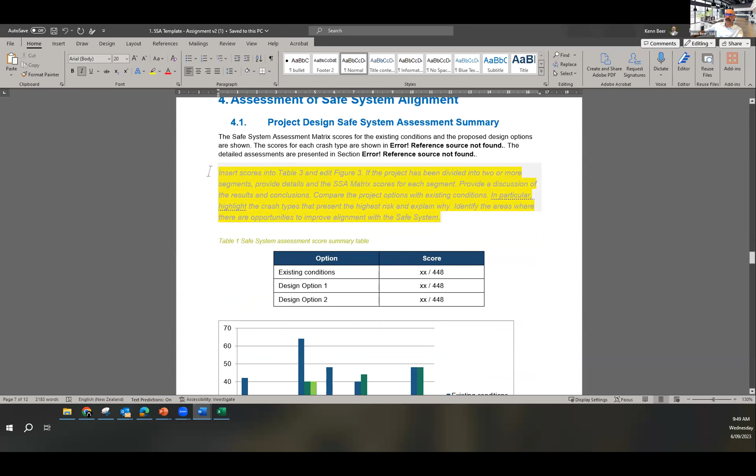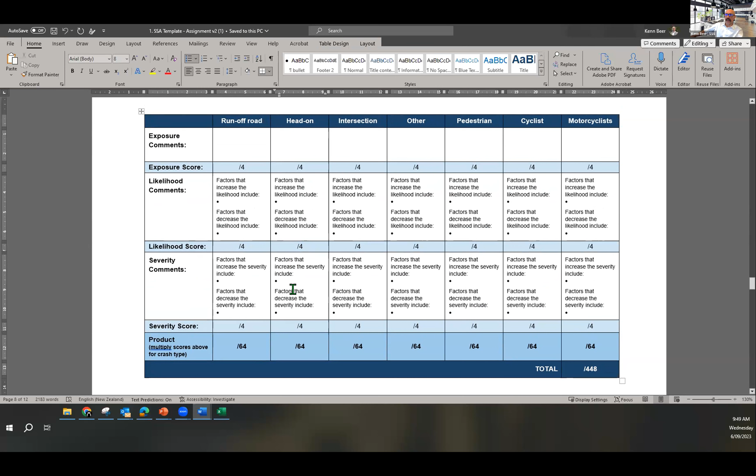And then you're into the safe system assessment process of the safe system audit. So you're actually not going to start with the scores and the numbers. You're going to start with the matrix, and you're going to fill out lots of dot points around each point here and here and here, and all these down, fill out the numbers. Then you're going to copy that whole thing after you've completed it.

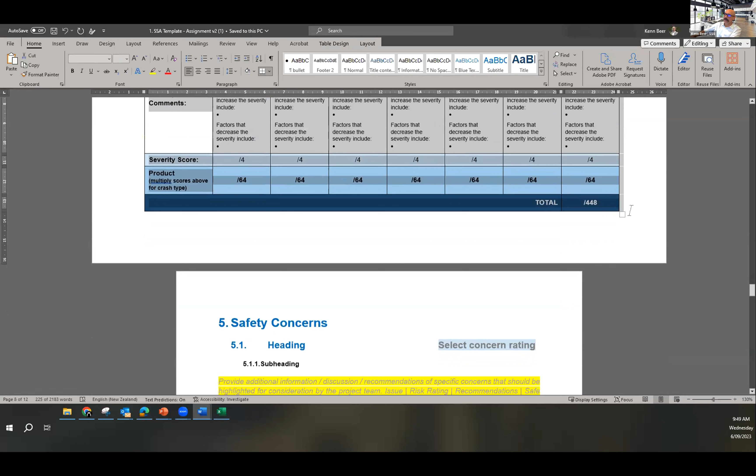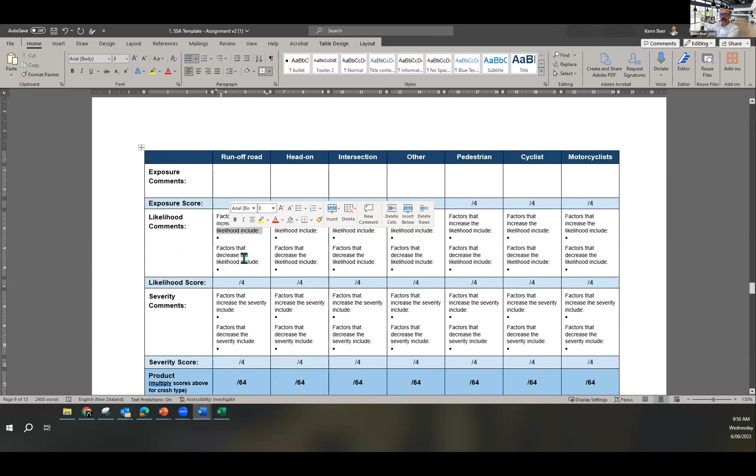You're then going to create a copy of it. So you've got a second one there, and you're going to then manipulate it as you would. So you're going to cross things out. You're going to change information. As I've shown you in the previous module, I've got an example of all of this for you if you're thinking, oh, I'm not quite sure what he's talking about. So you'll fill all of that out as per looking at the design and the site.

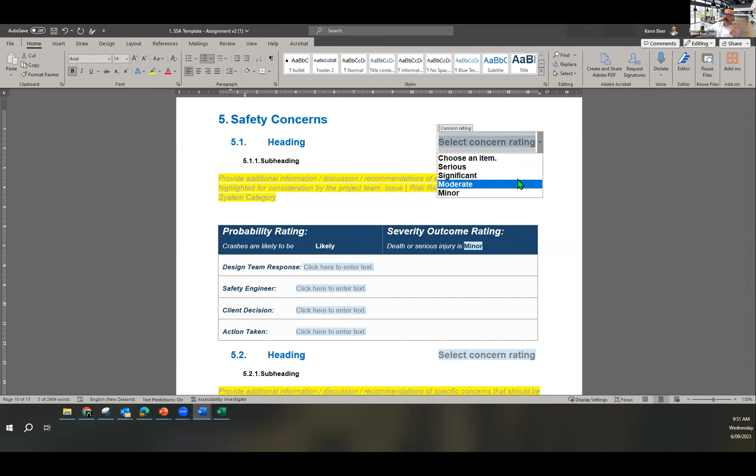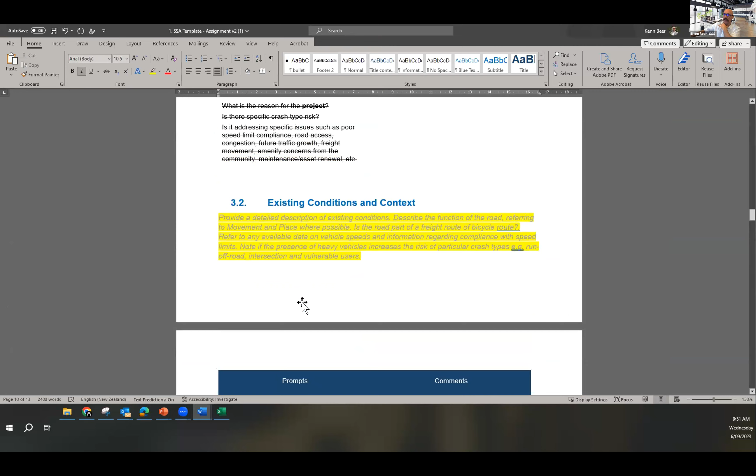And then you'll go in and you'll take three safety concerns, only three. And you will write out your safety concern, issue, risk rating, recommendations, safe system category. You'll risk rate them here: likely, minor, resulting risk rating, moderate. You'll have to use the risk matrix back up here to work out what the resulting risk is.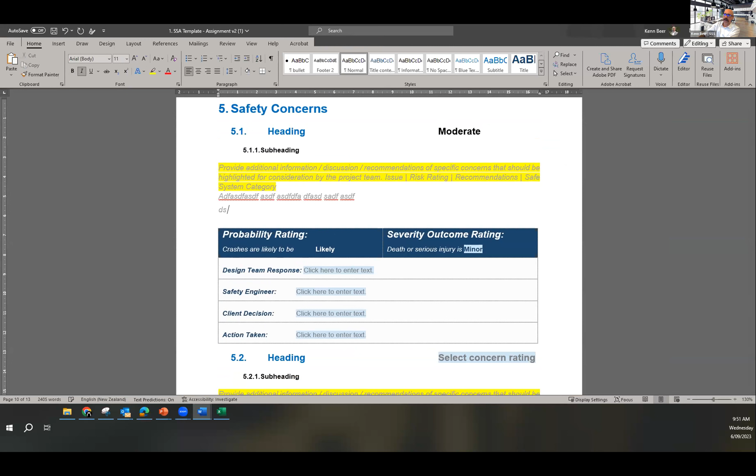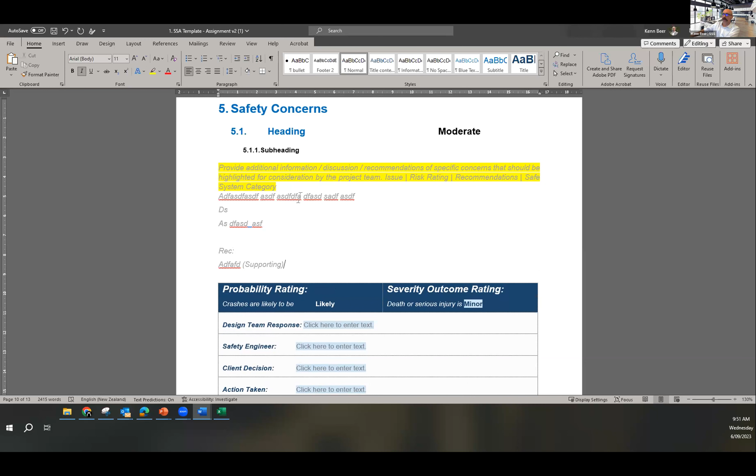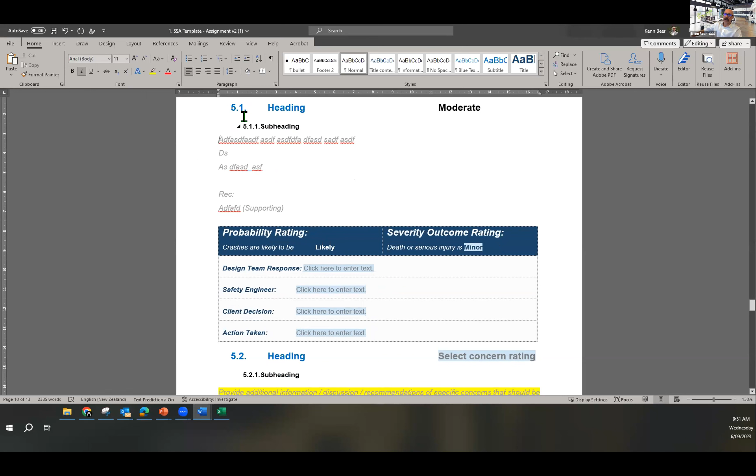And you'll fill out information, you'll put a snip in. So you'll be writing lots of stuff here. And your recommendation and supporting, and put some snips in. And then you'll be able to delete this, and that'll be a nice audit finding with a snip. You leave all of this blank because that's not for you to fill out. That's for whoever you hand it to. So you'll do one, two, three of these, and that's it.

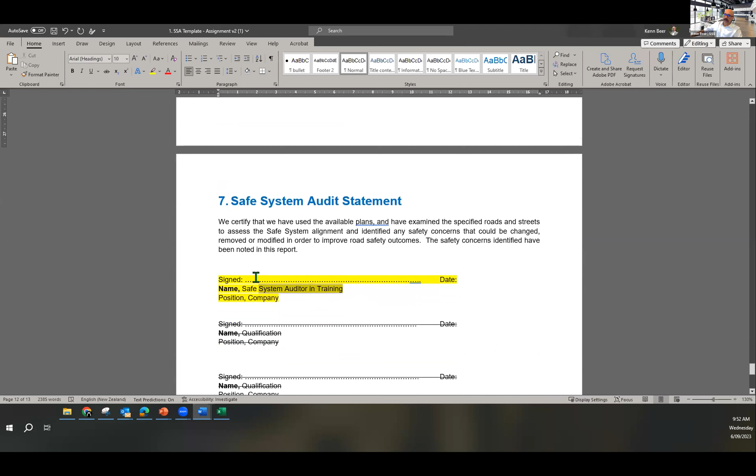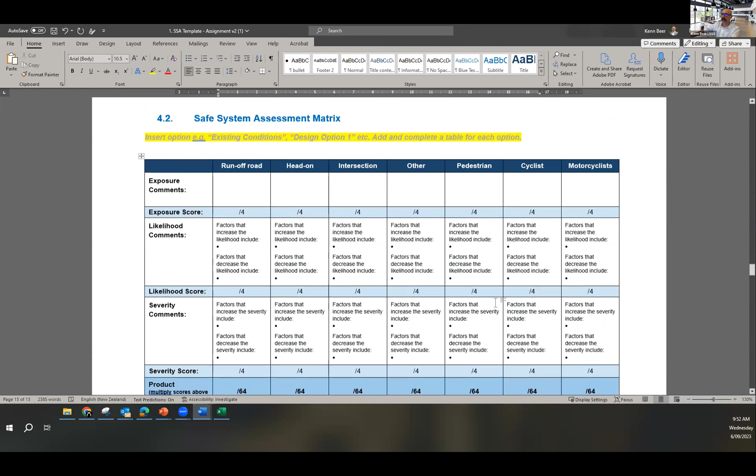Then the only last thing: you'll write a bit of a conclusion, and then you'll put a photo of you at the site to prove to us you actually went to the site. Safe System Auditor in training, you pop your signature, and that's it. The one thing I suppose you won't have done yet is, after you've done your matrix and you've got your scoring, you then will add the scores in here. You only have one design option, so you'll be able to delete that row.

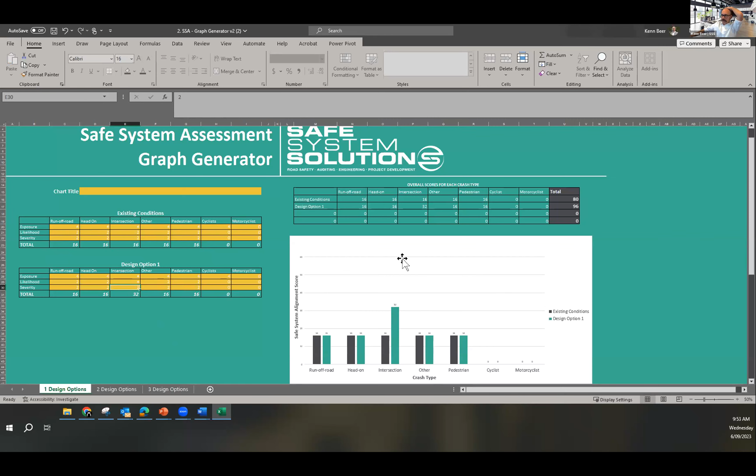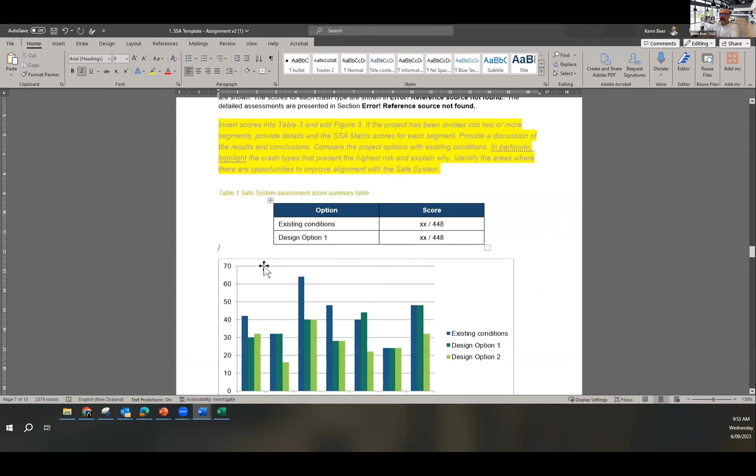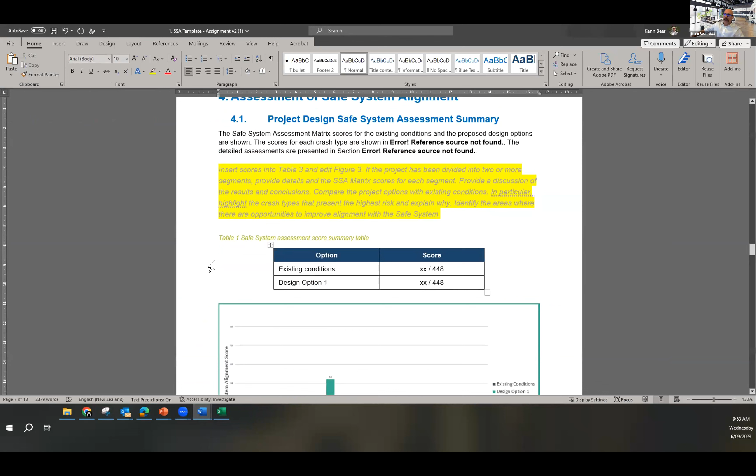And to make your life easier, back in the learning management system, this graph generator is just a little thing to make those graphs. So you'll be able to put the scores you have in there, whatever your scores are. You'll have to put your own scores in; I'm just popping some in to get us going. You'll see that they appear there, and you'll add scores there, and it'll produce a graph. You can maybe take a nice snip of that if you want. Go back in here, delete that, pop yours in. Hey presto, easily done.

So you're going to finish all of that off, and you're going to then go back to the learning management system. You're going to hit upload, which is not there because I'm in the teacher mode, and you're going to drop your PDF in there. Due date is Friday the 15th. So you've got a little bit of time on this one. I suggest you get onto it fairly quickly. You can ask questions in the next session if you've got any, or of course you can organize a one-on-one session with us at any point.

But I want to show you here in Module 5, we have an example Safe System Audit Report. Okay, we've created this to try to help you along so you can see what we're expecting.

This has been created for training purposes. It is an existing intersection there in the Auckland area. But you can see here, you've got a bit of an exec summary, but you've got that information about the process. You've got the risk thing, which is all in there.

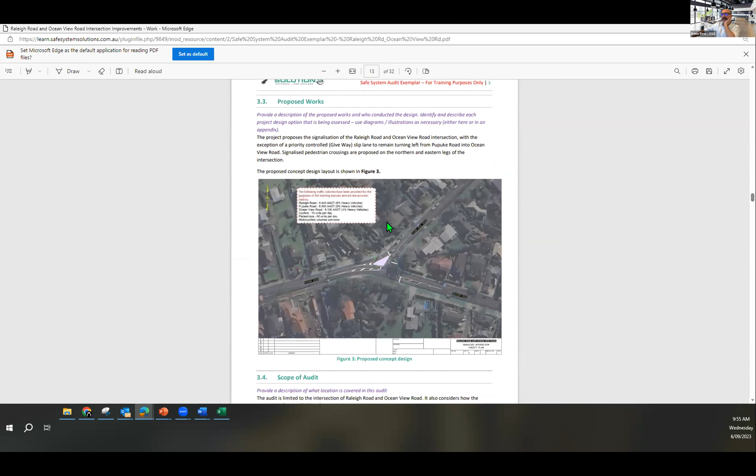Then you can see here a bit of information about the audit type, the audit team members, and you'd write your name there. Some overarching bits about the meetings and site inspections, some information about the project, a little snip of the existing conditions, a snip of the design there, the drawing number, which you don't really have. Then you can see there's the graph, and there's the commentary around the graph, a little bit of information there.

And then you can see for each safety concern, we've got heading, likely, minor, moderate risk, description of it, snip from the design or a photo, recommendations, supporting treatment. So we want to see 3 of those sorts of things represented, and hopefully these will help you a little bit along the way. A bit of a conclusion, signed, and photos. As we say, we would want to see a photo of you on site.

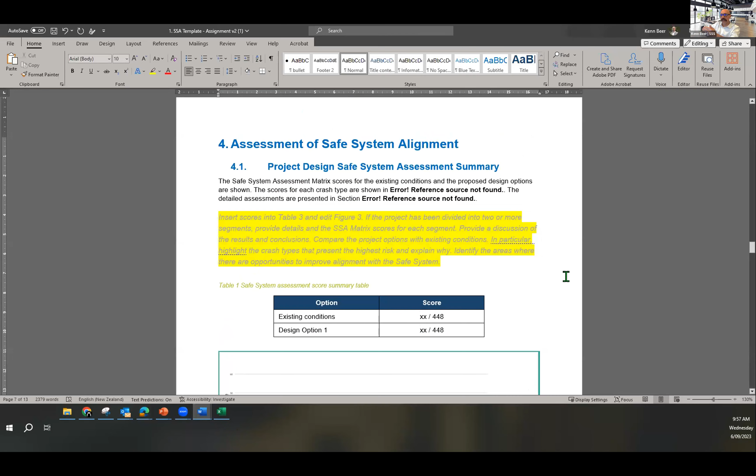So we'll be expecting 2 matrices for this. Now for photos in a real one, you'd certainly be putting site photos, but we're happy for you to just put that one photo of you on site. We don't need to see all the site photos from your assignment. So hopefully that'll help you a little bit. It's kind of more what you would genuinely be producing if you're doing a safe system audit, but it's got the elements for your assignment that you'll be able to follow. But just go to your template, fill out the information you need, and find your site there.

So I've covered a lot there. You might want to go back and watch the recording when it comes up to just catch anything I missed. Loretta, any questions come up that I need to cover? Oh, just to quickly confirm on that Word template, it's just the highlighted sections that the participants need to fill out, not the strike through. Is that correct? Yes, just the highlighted sections, although I missed highlighting it here. I've just updated it, so everyone will get the updated one. Okay, thank you so much.

And that's a good point. Download it when we finish today, because if you downloaded it yesterday, it's not up to date. So download the latest one. So just the highlighted stuff. If stuff's crossed out, don't worry about it. We've said, for this purpose, we're not going to do it. You won't know the reasoning behind the project and some of this stuff, because we're not giving you all of this background. You don't have growth models and freight movement information. So we've said, well, we won't worry about that for this. We're just about you filling out the matrices, identifying 3 issues and reporting them really well.

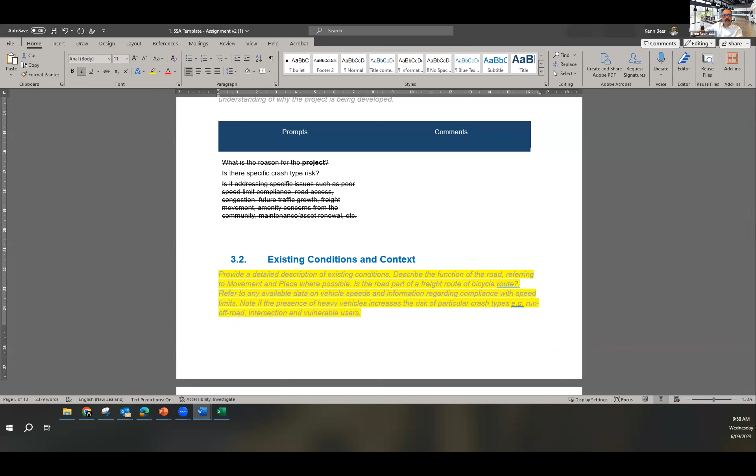Okay. Any other questions? Well, next session on Friday, we're going to do a little bit of practice safe system auditing, get you in the groove of it. We'll do that as a group. So you'll get a bit of practice on this. But of course, anytime, if you're getting into this and you feel overwhelmed or you don't know what you're doing, get in contact. We're here to help you.

One last question from Josh. Can you use the RSA findings from a previously completed audit on the RSA course? So obviously Josh has got the same site because he's probably in the same area, and that's in our bank of sites. I'll let you do that. You can use the same one, but you're going to have to go through this safe system audit process now for the whole site as well. Okay.

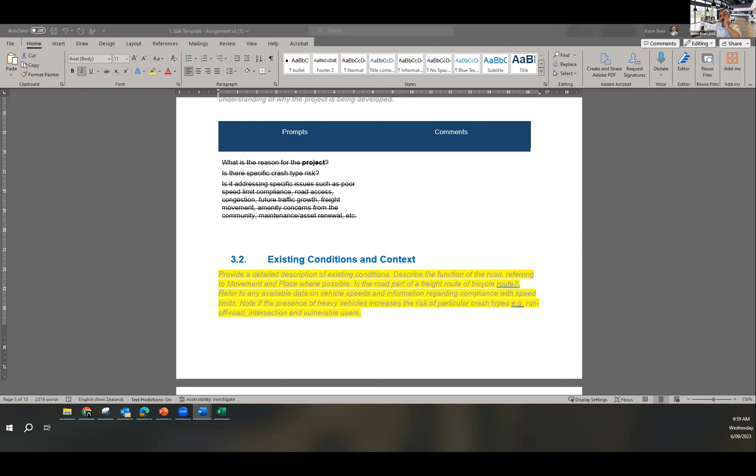Any other questions or comments? I think that's it. Okay. Well, you've been given a lot of information and tasks to do. It's all in the learning management system. Just download it, follow it through. And don't leave this to the last minute either. Let's get on to it.